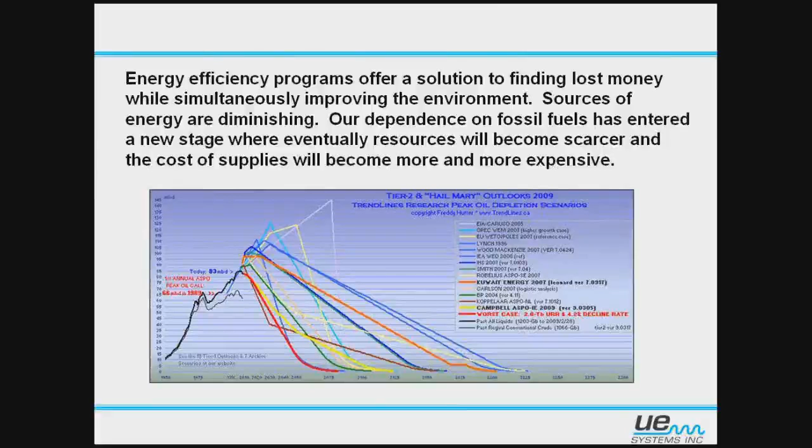To reduce the impact of the finances for fuels, companies are aggressively finding and implementing new programs to reduce the usage of energy. Some of the programs require a lot of money to initiate, and it may take years to complete them.

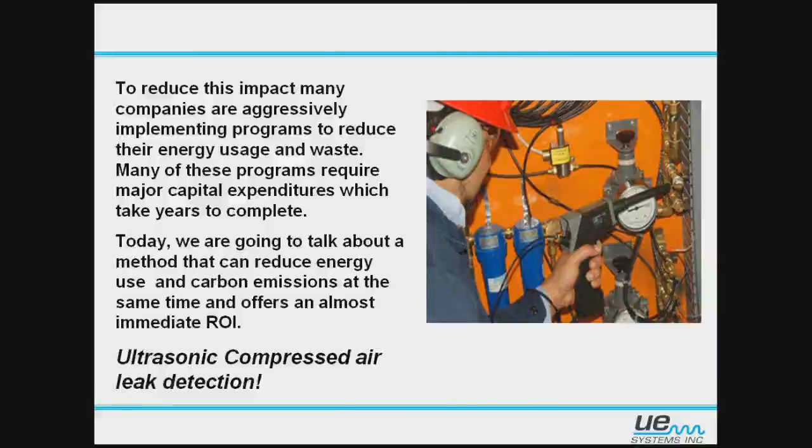But today, we are going to talk about ultrasonic compressed air leak detection. With that, we're going to talk about the method that can reduce energy use and carbon emissions at the same time and offer an almost immediate return on investment. And again, that's going to be leak detection. So let's get going on that.

But let's say we even double that usable energy to 36% efficiency. Is that a good standard? I don't really think it is. So really, what we're doing is we have an inefficient machine feeding leaks, making it more inefficient. So we want to get the very most efficiency out of that machine that we can, because it's already inefficient.

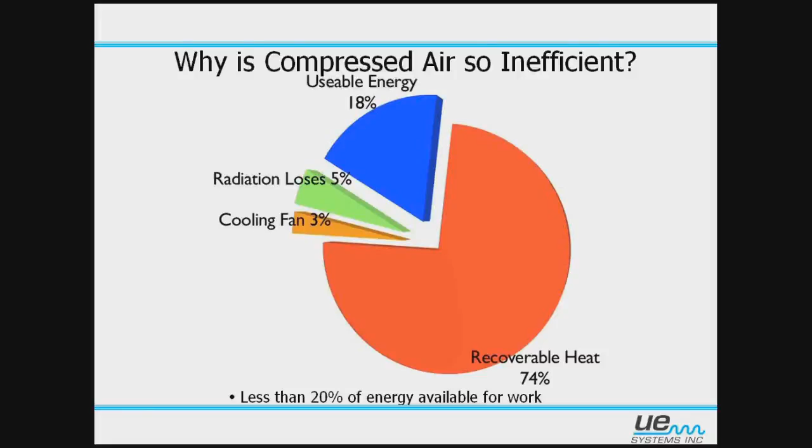Just to give you an idea, I looked up some stuff here. On average, it takes 8 horsepower of electricity to make 1 horsepower of compressed air. That's not a very good ratio. 1 horsepower of electricity on average is about 746 watts, or you can think of it as 1 horsepower of electricity will produce about 4 CFM. So a lot of electricity just to make that compressed air, right? So we really want to make that as efficient as we can.

What's happening is this: imagine a pipe with compressed gas in it, whether it's air or gas, it doesn't matter. Imagine that pipe springs a leak. So you have that compressed gas escaping out into atmosphere, which will be a lower pressure. What happens at that leak source? That compressed gas wants to expand out to the lower pressure outside. Once it does that, or as it's doing that, it forms little vortexes and eddies—think of them as tornadoes. All that, right in that area, that leak site, is turbulent air.

Turbulence emits ultrasonic sound waves. These ultrasonic sound waves are very directional, which allows us to find them very easily with the instruments. So with the high-frequency sound waves, we hear them easily.

You may be thinking, how can I hear this in a noisy environment? We must think—just because it's noisy to our ears and our audible range does not mean it's going to be noisy to our ultrasonic unit. Remember, we focus in on a certain frequency. For air leaks, it's 40 kilohertz, and at that frequency it may not be as noisy as you thought.

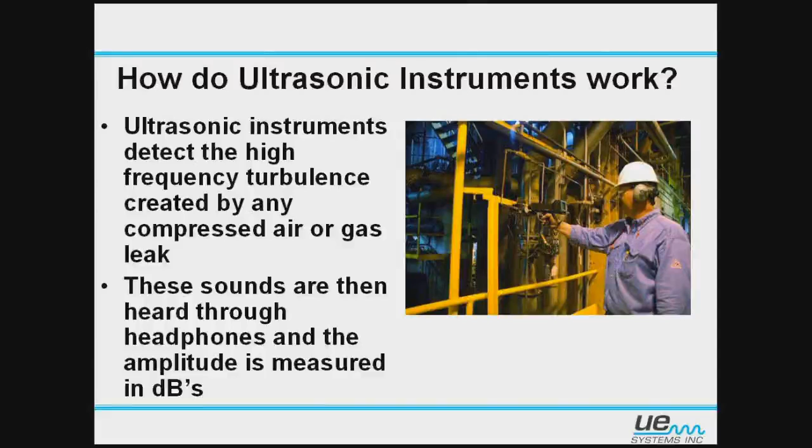At the very beginning, we see the gentleman starting at a distance from the area he's scanning, with his sensitivity turned all the way up. Think of sensitivity as how much power you're giving that unit to listen to that sound. If we turn that power all the way up, we're hearing all kinds of stuff—right now he's probably hearing everything, so he can't hear it well. He'll adjust the sensitivity down until he finds a directional sound wave.

Once he finds that sound wave, he's going to adjust it down to just where he can hear it. It doesn't need to be loud—loud is not always good. He keys in on it and starts walking toward that sound.

He should have adjusted it down so that when he's focused straight on and listening, flicking his wrist left or right, he barely hears it in either direction, or doesn't hear it at all. But when he comes back to center where he heard that sound, he should hear it nice and clear. Then he'll start walking toward it.

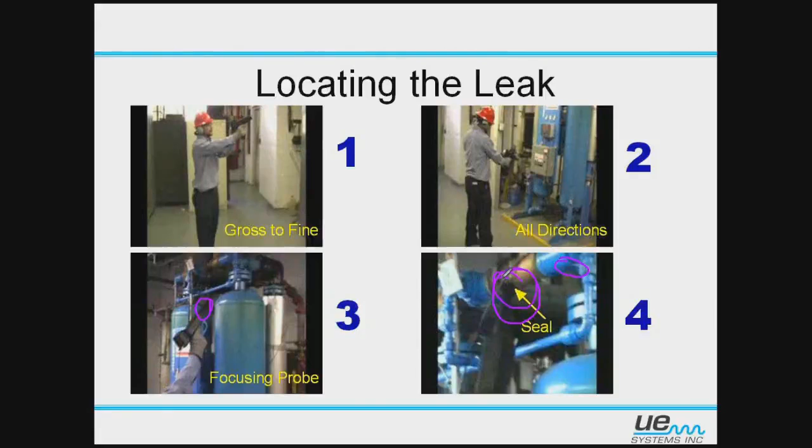Once he's sealed up on that rubber boot at the leak site, he's going to store the decibel. But before he stores it, he'll back off 12 to 15 inches, or 30 to 38 centimeters, from where he sealed up and confirmed the leak. So remember: confirm where the leak is, then from that point back off 12 to 15 inches directly, and then store the information.

Once we store it, it records the information as a decibel reading right there. We're going to measure the leak in dBs, or decibels, and that decibel gives us a whole lot of information. Also note that he is at 40 kilohertz — that's the place to be for air leaks.

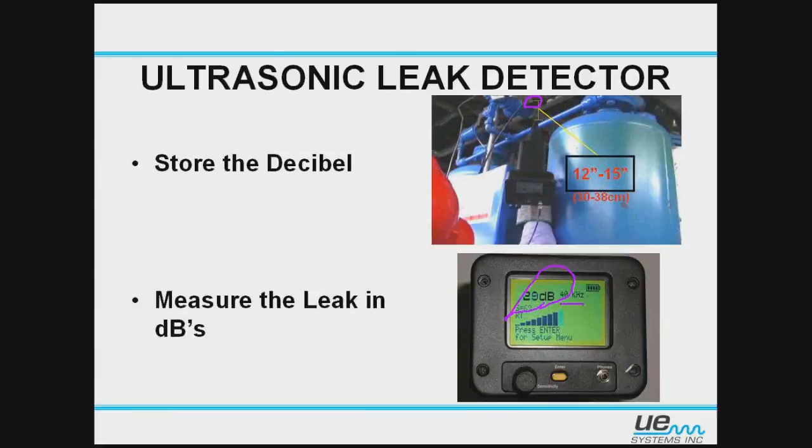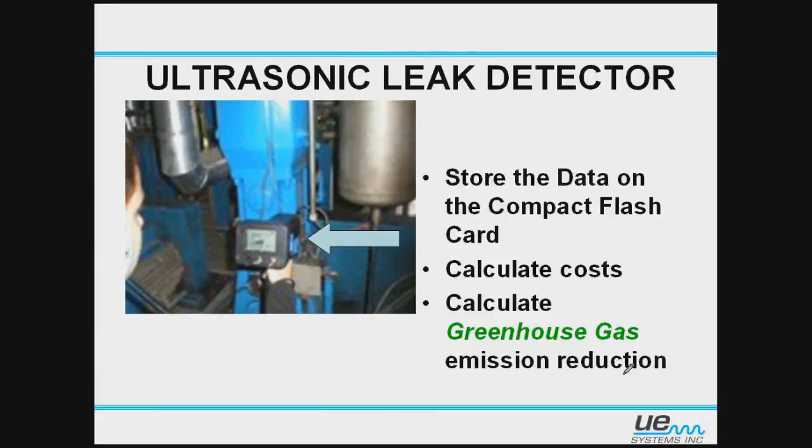When you store the information, you'll save it either on a compact flash card if using the 10,000, or on the onboard memory if using the UltraProbe 3000 or 9000. Then you connect to the computer and download the information, whether through a flash card reader or directly to the gun with the 3 or 9000. Once we do that, we can calculate cost, calculate greenhouse gas emissions, and how we're avoiding that as well. So the software gives us a whole lot of information. With that thought, let's look at that software.

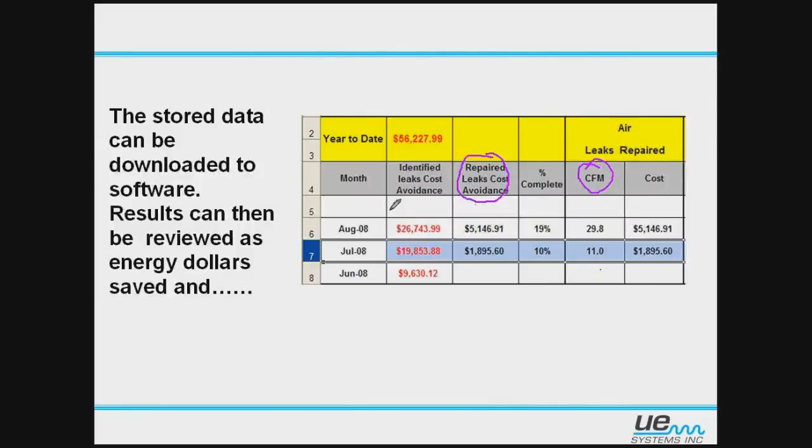If we move over to the repaired leak cost avoidance, it shows us how much, once we repair and document it, we've avoided in electrical cost. It also gives us a percentage of what we've completed, plus our CFM — what we're leaking in cubic feet per minute — and a tally overall. We can convert that CFM into kilowatt hours to get a cost, and it does that automatically just by entering the decibel and correct pressure you were scanning for.

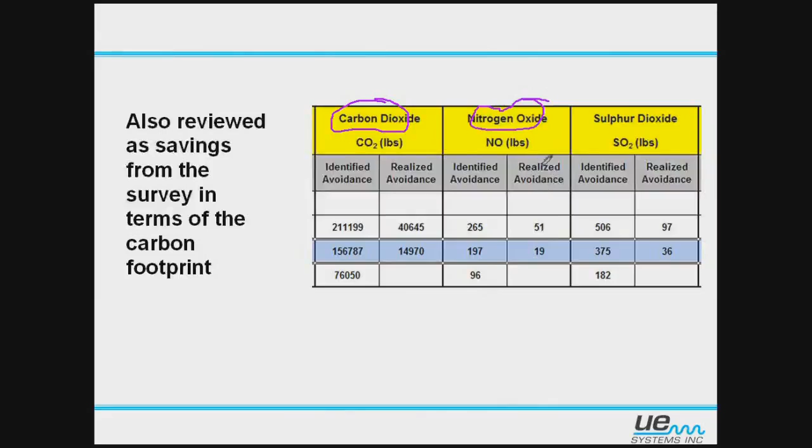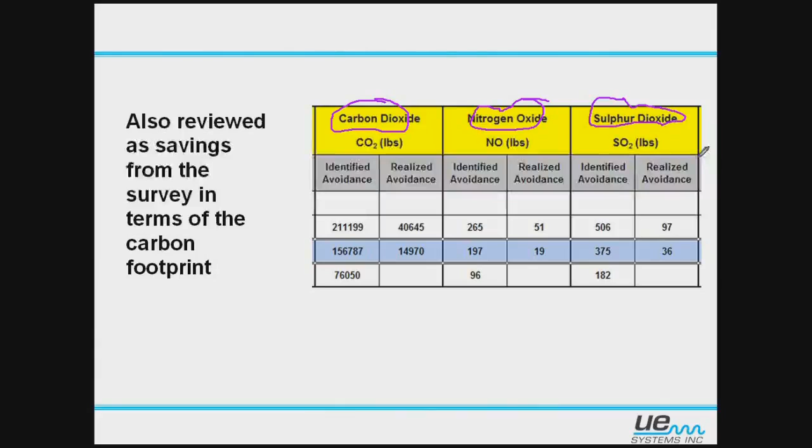The big thing the software also does is show the carbon footprint, or carbon dioxide avoidance, by not using that electricity. It shows carbon dioxide in pounds — identified and realized, meaning completed repairs — along with nitrogen oxide, identified and completed, and sulfur dioxide. It gives us a figure showing what we're actually avoiding, which really helps beyond just plugging the leak. It lets us know: here's what we were leaking, here's what it was costing us, here's what we were putting into the atmosphere, and now look at what we're not putting out, and the money we're saving.

So now, let's see how we convert all the data collected from the compressed air survey into usable, reportable data. We're going to back out of the PowerPoint presentation and look at the software itself, starting with UltraTrend DMS.

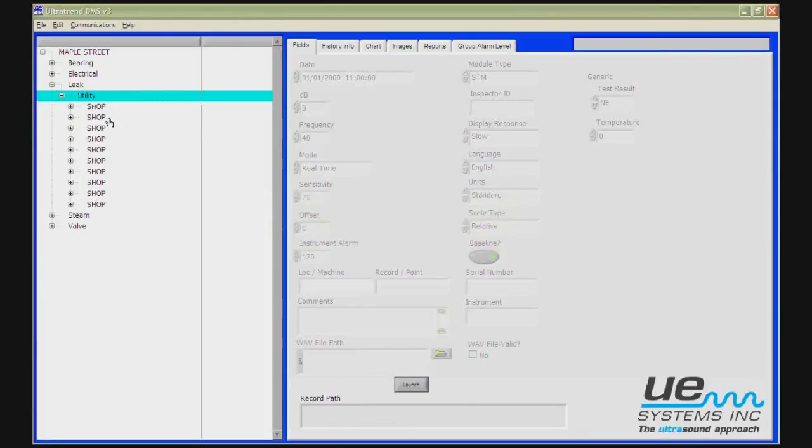Now, here I have the route, and these were collected data points. You don't necessarily build a route for air leaks. You may build it down to Maple Street leak and then name the area that you're going to go survey, but how in the world would you know to the exact point you would find those leaks? So the way this one was particularly done was they built it down to utility. They're going to go survey the shop. Once they surveyed it, they added all this in when they downloaded the information. This was blank, but when they came back and downloaded it, it populated it for them.

So the shop area, they used tags for each one of these that they located. Each one of these numbers is an identified leak. The tag number for this first one here is 12334. Notice it has a 001 after it, and if you go below that, notice it has a 002 after it, and so on and so forth all the way down. The computer will automatically generate these numbers, the 001, the 002, and 003. Don't be concerned with those. Those are your point numbers or your location where you exactly found that leak.

The way you're going to keep up with it is either by description or by the tag number, a 2- or 3-part tag that you can get from us or wherever. But you want to tag it. How is anyone going to come behind you and literally know where that leak was to repair it? 12334 was that tag number.

And let's open up that tag or that find, and we keep up with the readings by time and date. So we have 7/9/2008 was when it was found at 2:02 p.m. Notice when I highlighted that reading there, it highlighted or activated the field view over here.

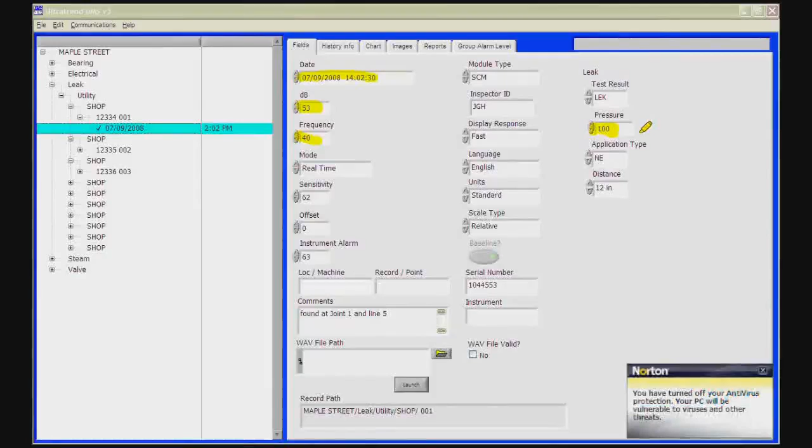Is there some kind of gauge on the other end where you actually know what that pressure is at that point? So don't, just because the compressor says it's putting out 100 psi, assume that by the other end of it, it's probably not getting 100 psi. So you might want to check that any way you can.

All right, but again, these are the big important things, dB and pressure. Those two things are going to give me a CFM, and we need that CFM dramatically. And then again, we double check our frequency for 40 kilohertz, and of course it'll populate the date for us.

All right, the rest of it, we don't really need that information other than maybe down here at comments. Comments, we could type in here, notice I wrote in found at joint 1 and line 5. This will export this information as well.

Okay? So with that, let's look at the next one. Let me go back over here and change out that highlighter just so you get the idea. If we look at this one, we'll open up that reading, and we see 40 decibels here at 150 psi. Do you see that?

So all the information can be changed in here. You could change that to 100 psi if it was 100 psi or whatever the pressure was, or just leave it where it defaults and then export it, and then change it in the compressed air software.

So let's say we're done here. Let's say we've downloaded this information. We've come in here to check, and we've made sure every one of these has the correct readings for us, the decibel. Maybe we've added some comments as a description of where the leak is located, and we made sure where the pressure is.

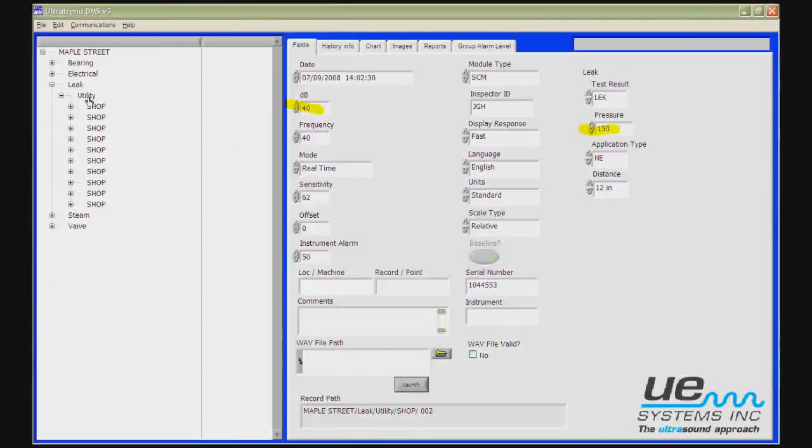All right. Once we get to that point, what we want to do, I'll close this up to make this look a little neater. We want to go back up to the utility, the name of the group is what we want to do. We want to export all that information we just collected into the compressed air software.

Now, we have just recently updated this and put the compressed air software into DMS, so you can export straight to it, whereas before you had to manually input all the information. If you still want to do that, it's still available on the web. You can keep on doing it that way.

But let's go through here, and I'm going to show you what we've done different and made it a little easier. So I've highlighted, notice you've got to highlight the name of that group, the name of that route. We call it a group to be able to export. Once I do that, notice there are tabs here at the top.

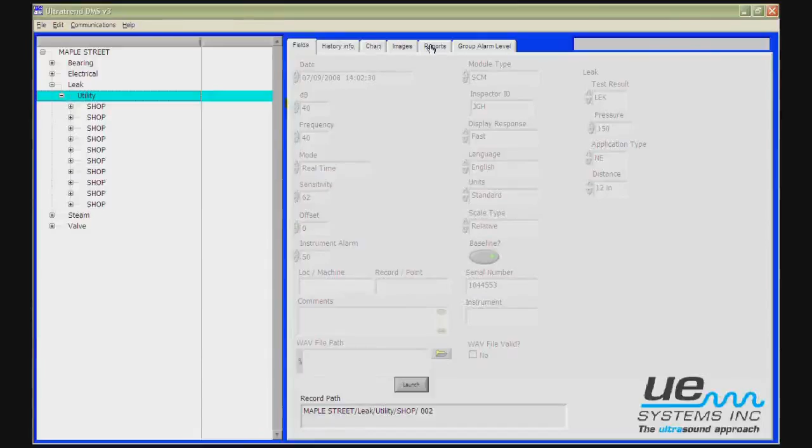We were in the Field tab. We're going to skip the history info, the chart, and the images, and we're going to go straight to the Report tab. So I'm going to click on the Reports tab. Once I'm in the Reports tab, I have two options: View Group in Excel on the bottom, Launch Export Wizard on the top. Forget the View Group in Excel. Remember Launch Export Wizard, all right, because it's going to walk us through exactly what we want to do.

So I'm going to launch that now. Here it just tells us what it's getting ready to do. You can read through that when you do it. Just go ahead and hit Next, and it's going to give me my options.

We have four options here: Simple Mode, Advanced Mode, Quick Mode, and those are for exporting stuff like a bearing group or route and stuff like that. What we want to do is the compressed gas spreadsheet, and that's right here. That's what we're going to choose.

I'll get back to being able to choose that. I'm going to select that by clicking in the circle, and that gives me the green dot in the circle. Now I know I've selected that, and once I've selected it, I'm going to hit Next.

Everything is set up for you. All you have to do is decide where you want to put it. I have a folder waiting for that on my desktop just for that, if I can find it. There it is, Air Survey. And I'm going to export that straight in there.

That's all you have to do. You don't have to do anything else. You don't have to tell it what to export. It's all set up for you. And we'll wait, my computer is slow. Maybe that's helpful for you guys, as there's a bit of a lag time, I believe, as you're trying to see this.

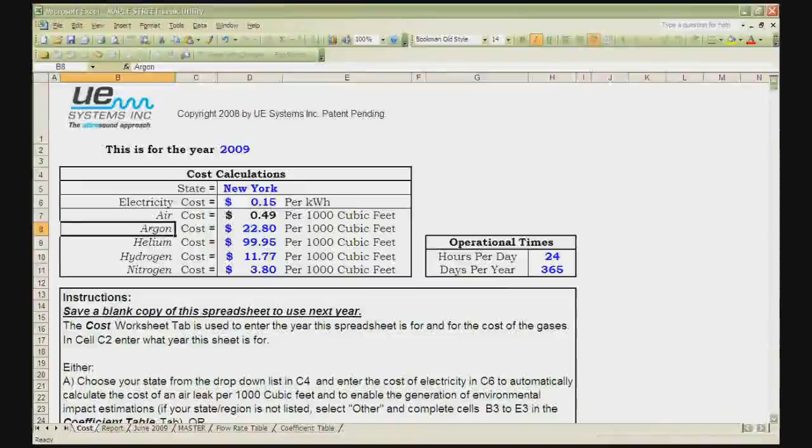Notice we also have some other gases here: argon, helium, hydrogen, nitrogen. Maybe you have some other kind of gas you're buying. To change what's in there, simply click in that box, come to Tools, Protection, unprotect the worksheet, and change the name of it, then come back immediately and re-protect the worksheet under Tools and Protection. Protect everything when you re-protect it. So we don't want to mess up any of the macros or equations in here.

But once you get the correct name, say we are going to scan for argon. Let's say it's $25. We'll click in the box and change that to $25 per 1,000 cubic feet. I actually have no clue what argon would cost, and of course it would vary on who you're getting it from and where you are in the world. But let's say it's $25 per 1,000 cubic feet.

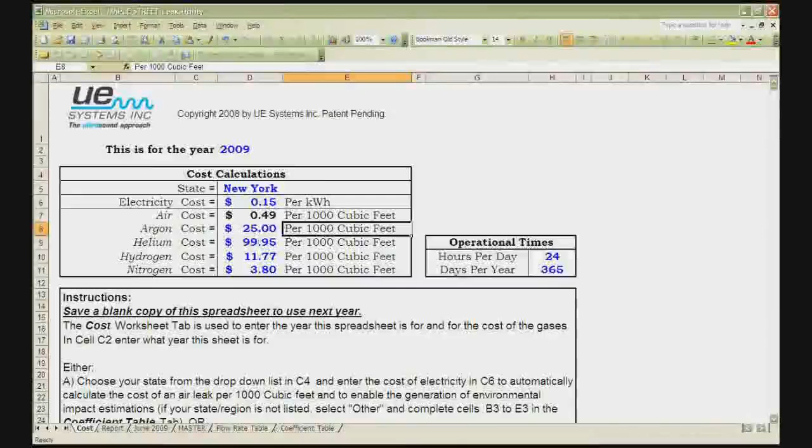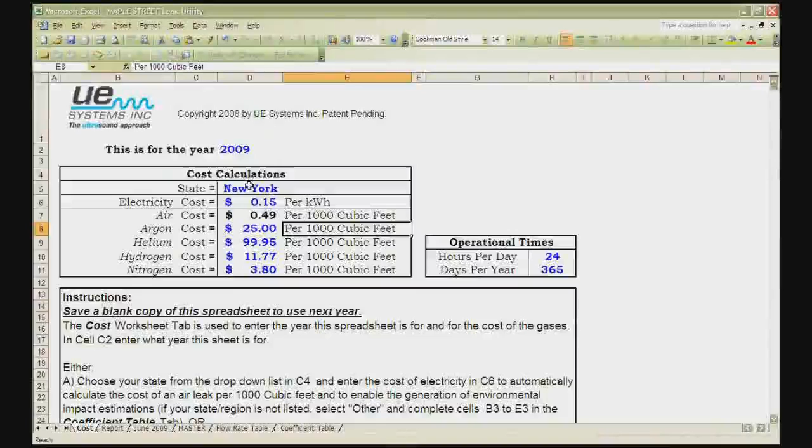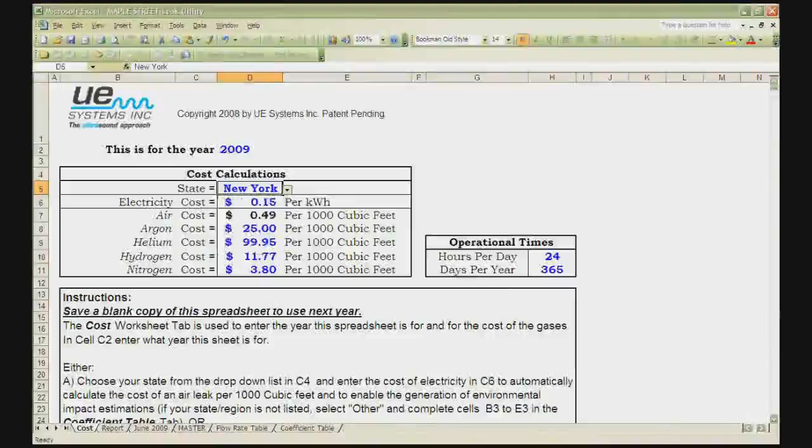So now, once we've got everything set up in here, wait, one thing more. The most important thing I almost left out was state, New York, because we're all talking about carbon footprints today. What that gives me, notice when I click in here, it gives me all the states. It also gives me an 'Other' option if you were somewhere else outside the United States. So we'll say we're in New York, and then we'll come down to the bottom where the tabs are for the worksheets again.

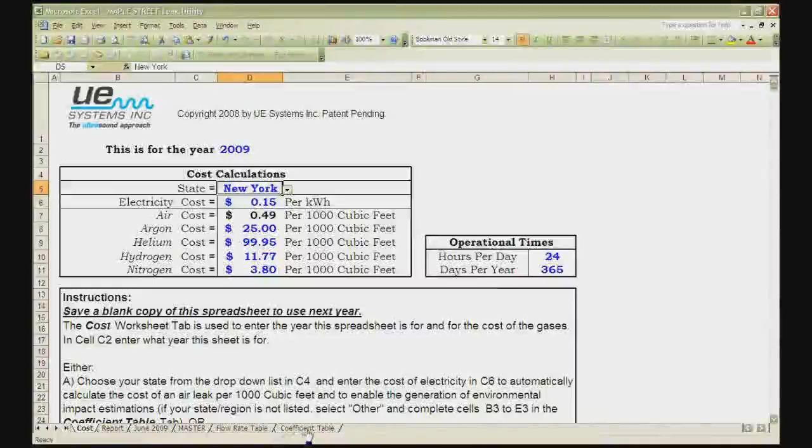If we come to the last tab where it says Coefficient Table, these are the state electricity coefficients provided to us by the Department of Energy. You can find this out on the web, or maybe you have a better number than we have. Maybe you are in these states, but you have a better number for your area of that state, and you know better what these numbers are.

Or maybe you're in Canada, or somewhere in Europe, and you need to find out. You'll put them in under Other, just enter those numbers, and that will give us our avoidance, our carbon avoidance for the compressed air software. That's where we're getting these numbers from. If you have any questions, contact us, but that's all that is. So it's important, if you're going to use that avoidance, to choose the right state or to put the right information in here.

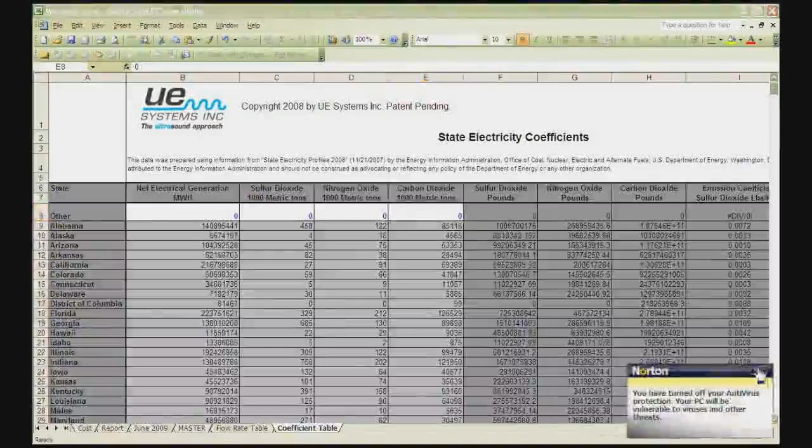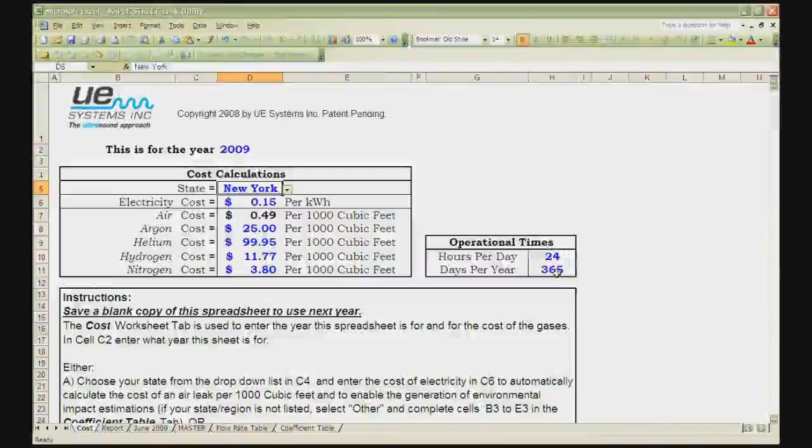All right, so let's go back to cost. Let's make sure we got everything. We've got New York, year 2009, 15 cents per kilowatt hour, hours per day 24, 365 days. Great, so now we'll go back to our report of June 2009.

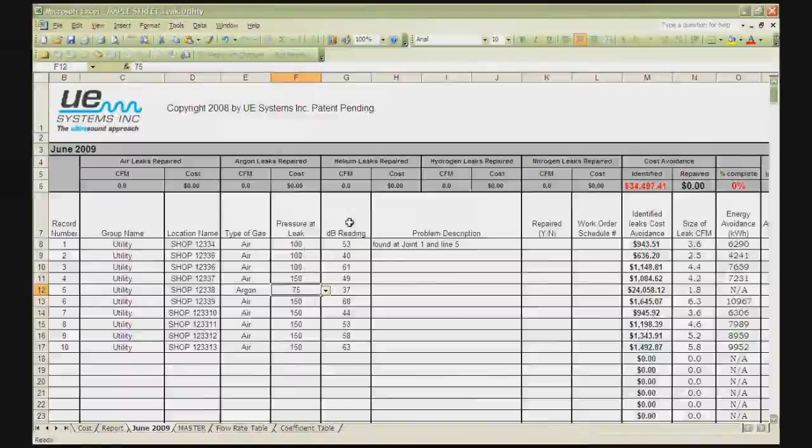And here are our decibel readings here. So we have pressure here. Make sure you're getting that correct pressure. Always round down to the lower pressure. The decibel reading will be the exact decibel reading that you collected. And then any descriptions you want to write in. I wrote in found at joint 1, line 5.

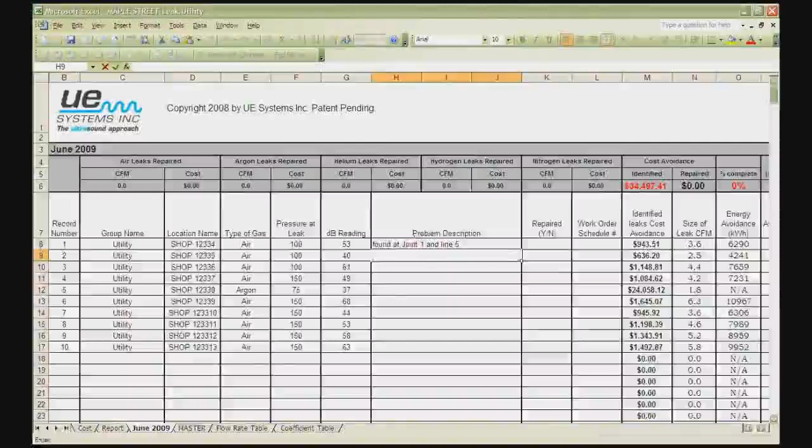We could write in this one found at, I don't know, joint 3 on line 2. And so just where is it?

And then the next column over, what we want to look at here is the CFM column. It's not the actual CFM, what we want to look at is the repaired under CFM there. It says Y or N, that means yes or no, has it been repaired. Right now, if it's not repaired, leave it blank, don't put N in there. Just leave it blank. If it is repaired, put a Y, because that's going to change things for us.

Note over here it says repaired $0. So we'll click out of that box. It automatically starts tallying how much we've repaired immediately, and that's just on this one report here. So let's scroll on over here to look at the end of the report.

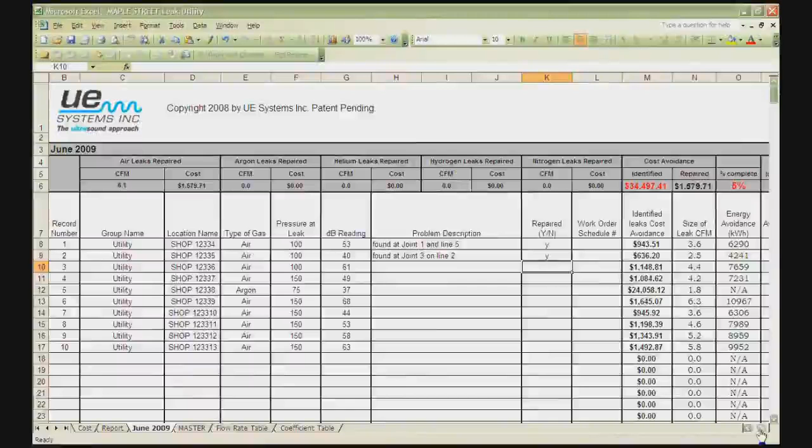All right, so we have the repaired yes or no, work order schedule number - did you get a work order for this, who's going to repair it. That's a big part of this, this has to be repaired. Did you repair it while you were out there? Did you carry some common-sized tools with you that you could quickly repair some of these leaks, or did you have to form a work order to get it repaired?

Next column is our cost avoidance column. Notice we've identified $34,497 worth of leaks. Now, I did throw in that big argon leak, but still at the same time, we are leaking a lot out of those 10 leaks.

$34,497, that's what we've identified, and only 2 have been repaired, so $1,579 has been repaired. The size of each leak, 3.6 CFM, 2.5 CFM, so on and so forth, all the way down. And then in percentage, how many have been completed? So 5% of what we found has been repaired.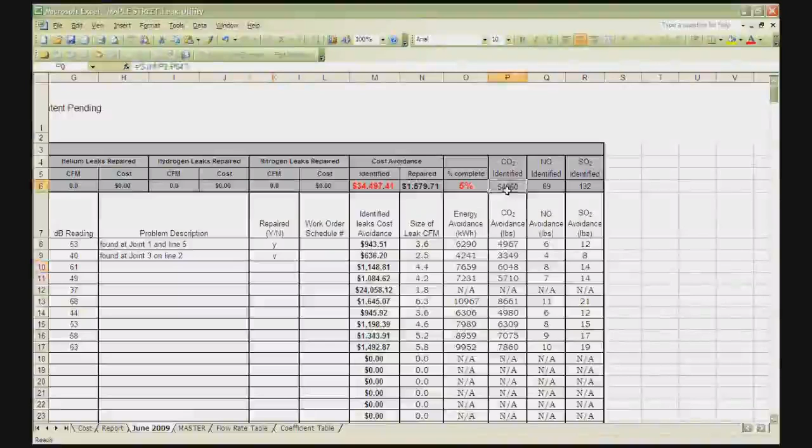And then the energy avoidance in kilowatt hours, so 6,290 kilowatt hours right there on that first leak at 53 decibels at 100 psi, so a lot right there. And then it gives us per leak as well the cost avoidance on the greenhouse gases here. We have carbon dioxide here, 4,967 pounds, nitrogen oxide, sulfur dioxide, there in pounds. So it gives it per leak, as well as a tally at the top for this survey here.

So what I want to do, this is just one survey, just walk you right through it, no big deal, it's just an Excel spreadsheet. I want to go down to the tab on the bottom and go to the report tab. The report tab is what tallies - we saw a screenshot of this earlier in the presentation. This actually gives us tallied information from all of the surveys we have done.

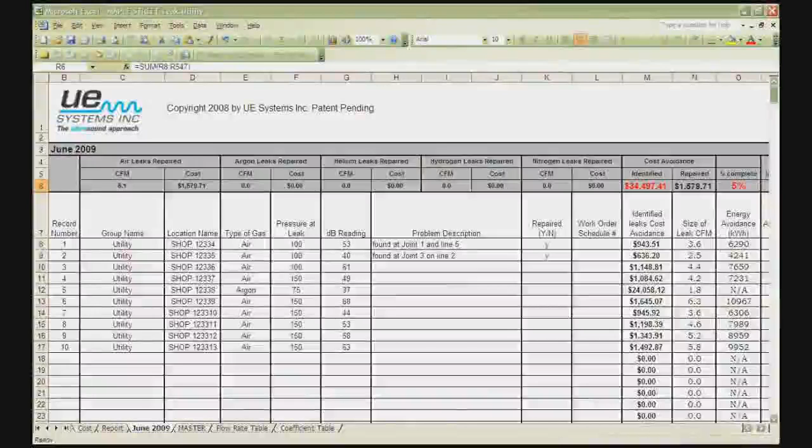So if I would export another one right now, this would start saying the date - June 25th, 2009 - and the time is what it would start doing. So you can keep adding on to this over and over again, and it will tally the information. Right now, year to date, it's the same numbers we saw already.

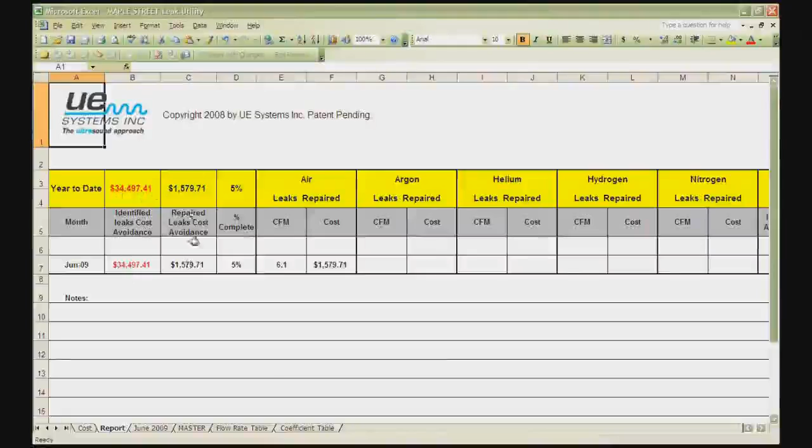$34,497 here, repaired leaks - it's just tallying everything, and then it will list each separate survey as you keep adding to this. So once you export the information, that's why I made a folder so I could always keep that Excel spreadsheet in there. I'm going to keep exporting to that same file, and it's going to ask me do I want to replace it, and I'm going to say yes I do want to replace it, because it's going to give me the old and the new when I replace it.

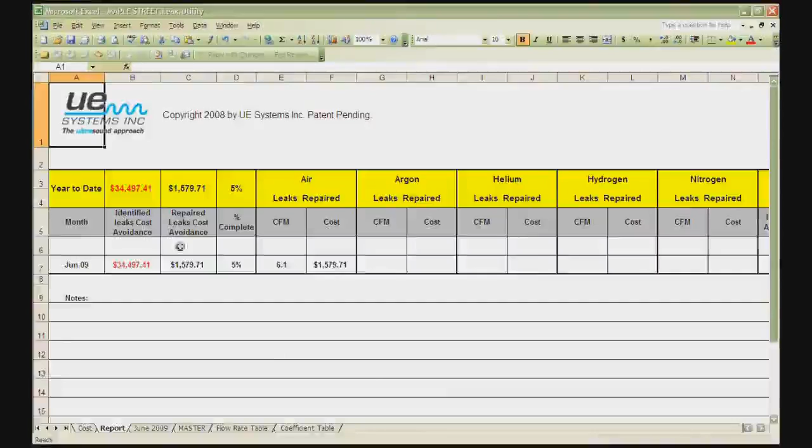If I say get rid of it or don't replace it, it's just going to add in a separate Excel spreadsheet, and that's not what we want. We want to keep adding to this one Excel spreadsheet to keep that running tally. All of this is printable and reportable, of course, and it is in Excel, so you can do whatever you want to with it after you've exported it out of here, but we're literally giving you the year-to-date, the exact CFM you're leaking, and that's all converting it to money.

So it's really simple, it's really easy to do. And you see, if you scroll across, it gives us all the information tallied up for us. And then, of course, you can add notes on the bottom.

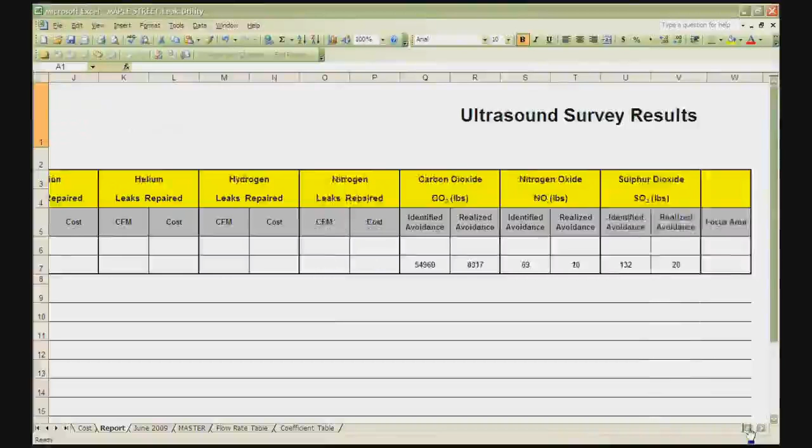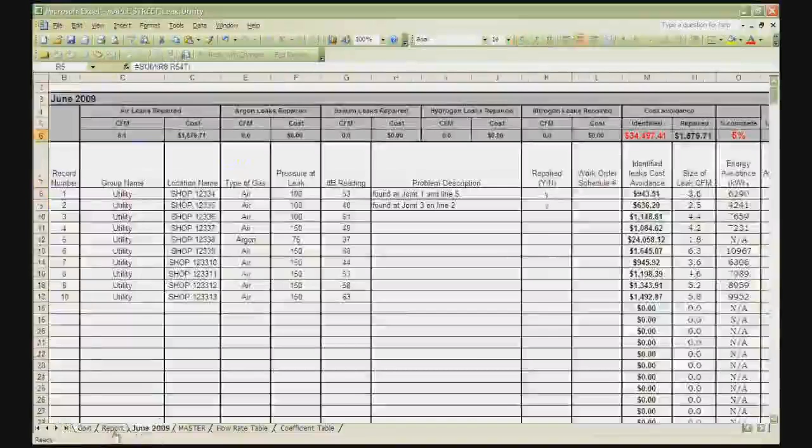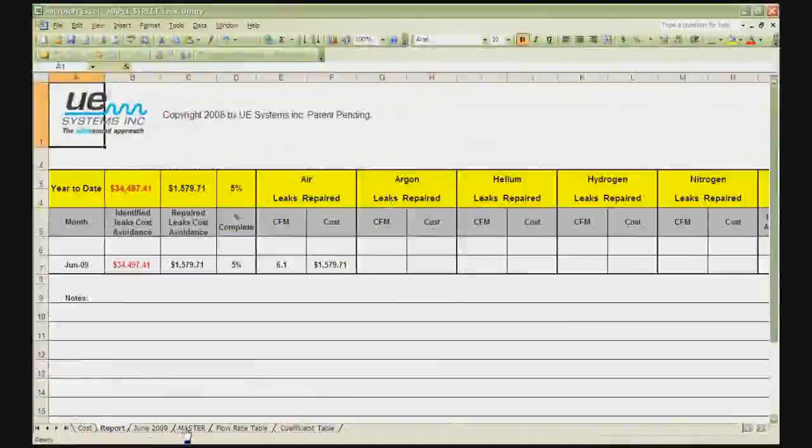Now, if you look at the tabs on the bottom, the big ones we're working with here: cost, the actual report itself, June 2009 there, report for the overall picture, and to make sure that we have the right coefficients to get that greenhouse gas avoidance. We do give you a blank master copy if you want to go to File, Save As, and save it as something different. You do have a blank copy that you can manually input information into.

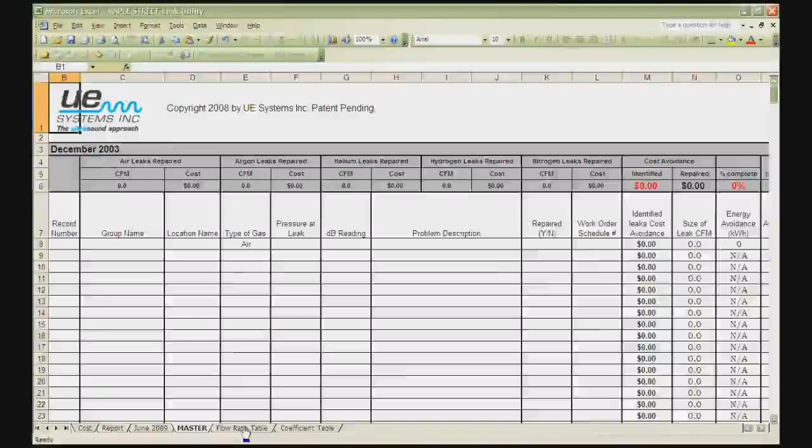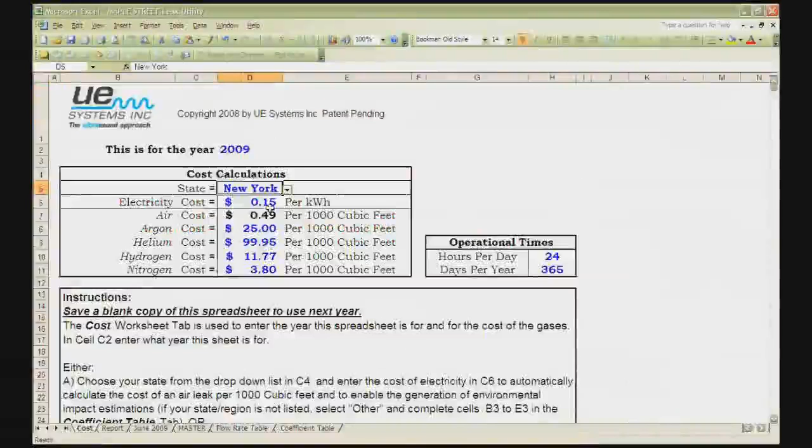And then, of course, a flow rate table if you're using some of the analog instruments, you can look through here. But again, with the new way we're doing it, all you need to find out is the pressure and the kilowatt hour. Everything else is industry standards as far as brake horsepower and everything like that for the equations to get this information.

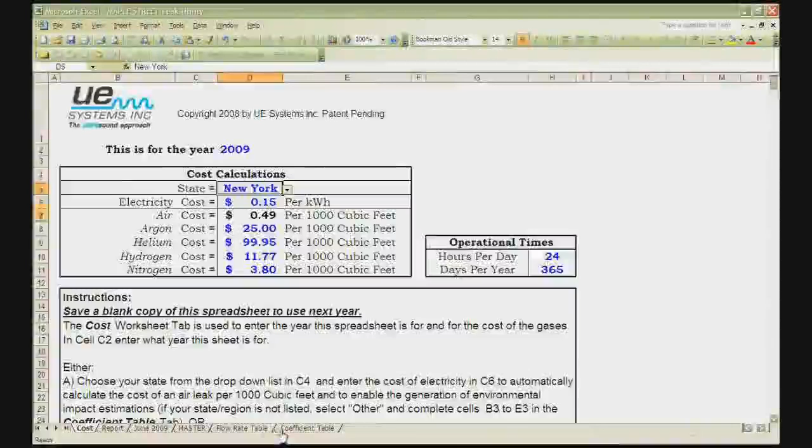Okay, so let's get back to, I believe I've covered that all. Let me think real quick here. I don't want to leave you hanging. Just take a look at it. If you have any questions, be sure to call us, we love to talk about this stuff. Yeah, I think that covers it.

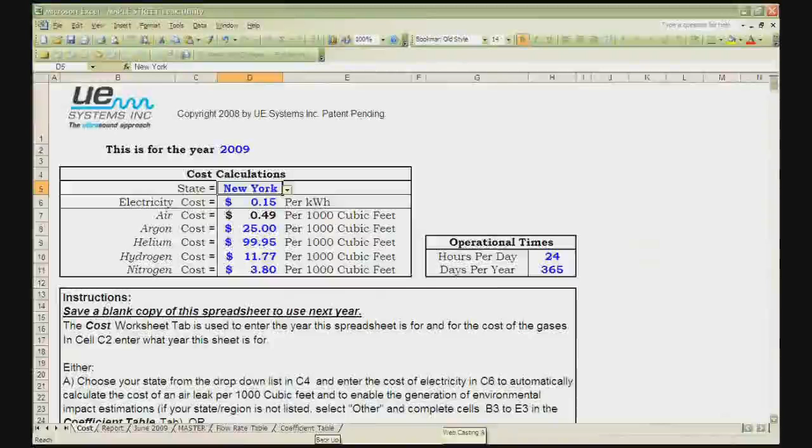So we'll get back to the PowerPoint presentation and finish that up, and we'll get that going. So we saw all that. It works really easy. Remember, in a wrap-up of that, we're going to go out and collect the information on our digital instruments.

We're going to come back. We're going to download it to the DMS. It's going to populate the information. We're going to export that information into the compressed air survey. We're going to correct our kilowatt hour, our hours of operation, our coefficients, choose the right state or the right numbers if you're not in the states. And then the rest of it does it itself, as long as you've chosen the right pressure and you've taken a good decibel reading.

And remember, it's so important to back up 12 to 15 inches before you take that reading. I know it's nice and easy to look at that reading right when you've got that boot sealed up on it and it says 95 decibels, and you back off and it says something like 70 decibels. The better reading is 70 decibels. Don't try to overdo it. It should be backed off 12 to 15 inches.

And remember, when you're looking for these air leaks, I see it every time I go train somebody. The guy takes the gun out, starts scanning, and he never touches that sensitivity dial, and he wants to give up almost immediately because he can't center in on the sounds. Don't think about where the air leak is. Remember, let the sound lead you to where the leak site is, and we do that by adjusting the sensitivity using the gross to fine method and then putting the rubber boot up on it and confirming the leak with that rubber boot.